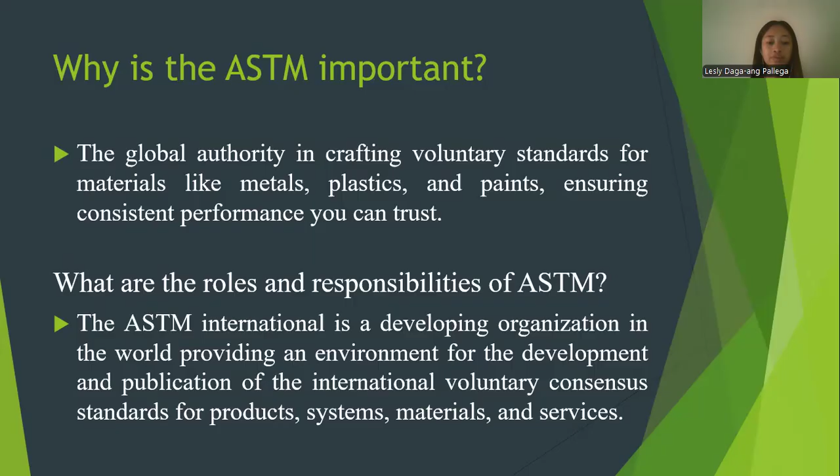What are the roles and responsibilities of ASTM? ASTM International is a developing organization in the world, providing an environment for the development and publication of international voluntary consensus standards for products, systems, materials, and services.

The history of ASTM. The American Society for Testing and Materials is an international standards organization focused on developing technical standards for a variety of industrial applications.

The ASTM organization was founded in 1898 by Charles Dudley. He was a chemist with the Pennsylvania Railroad while investigating rail breakage fractures. He noted there were different variations in steel quality and published his research on the subject. This subsequently led to the drafting of initial standards that have grown over the years.

ASTM was renamed ASTM International in 2001, and today has its headquarters located in West Conshohocken, Pennsylvania.

ASTM International does not formally enforce its standards, but these practices can be enforced by federal, state, and municipal regulations.

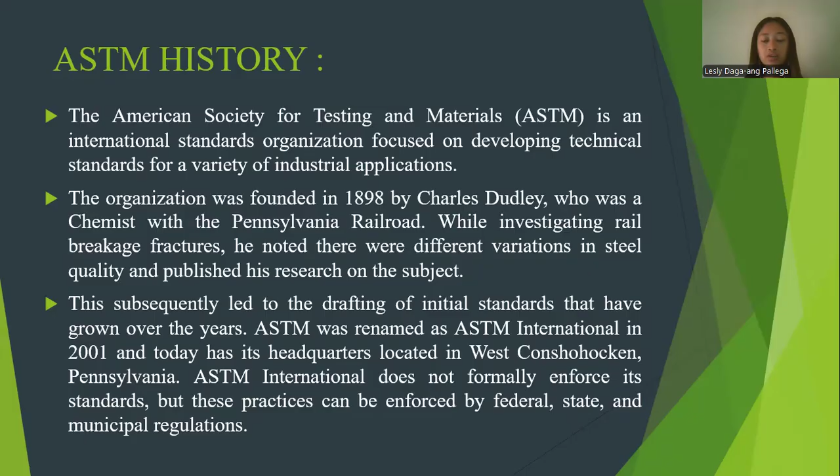What does ASTM stand for? Currently known as ASTM International, which is American Society for Testing and Materials, is a developer of international voluntary consensus standards. ASTM standards are developed by committees of relevant industry professionals who meet regularly in an open and transparent process to deliver standards, test methods, specifications, guides, and practices.

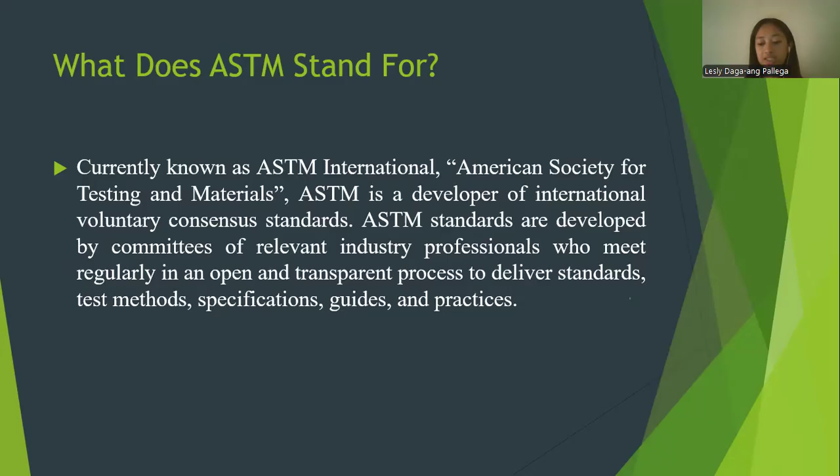The standards produced by ASTM International fall into 6 categories. First is the standard specification, which defines the requirements to be satisfied by the subject of the standard.

The second is the standard test method, which defines the way to test the performance and precision of the result. The result of the test will be used to assess compliance with the standard specification.

The third is the standard practice, which is defined as a sequence of operations that, unlike the standard test method, does not produce a result.

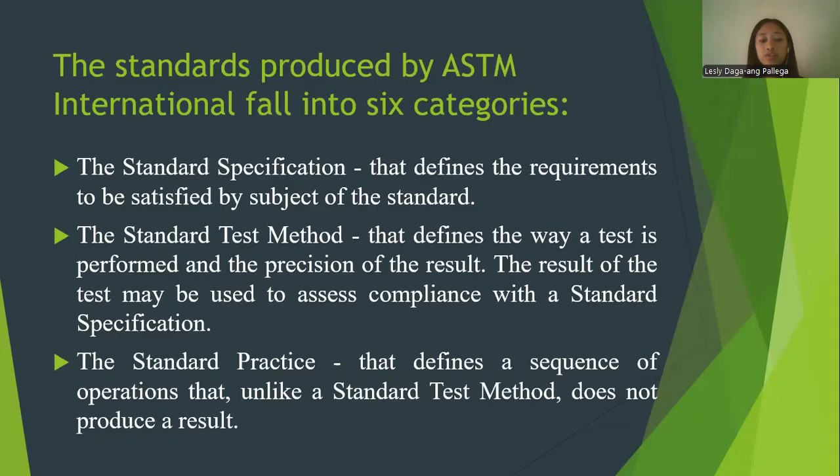The fourth is the standard guide, which provides an organized collection of information or series of options that does not recommend a specific course of action.

The fifth is the standard classification, which provides an arrangement or division of materials, products, systems, or services into groups based on similar characteristics such as origin, composition, and properties or uses.

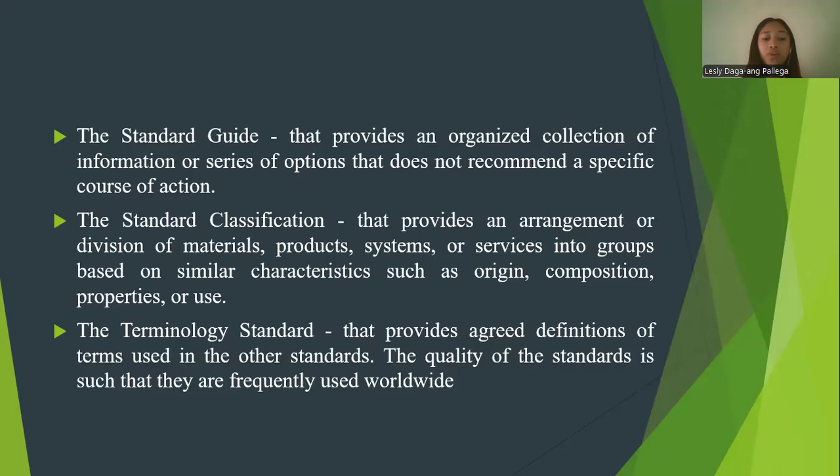And sixth is the terminology standard, which provides agreed definitions of terms used in the other standards. The quality of these standards is such that they are frequently used worldwide.

The different classes of ASTM: first is class A, for iron and steel materials. These class A standards cover iron and steel materials, including their structures, grades, castings, alloys, and mechanical testing. Steel is essential to the global economy, making ASTM standards widely applicable worldwide.

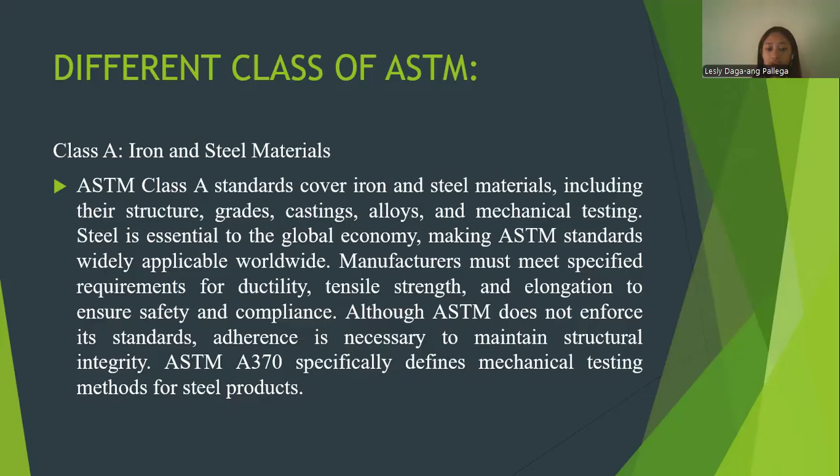Manufacturers must meet specified requirements and compliance, although ASTM does not enforce its standards. Adherence is necessary to maintain structural integrity. In ASTM, A370 specifically defines mechanical testing methods for steel products.

In Classification B, which is non-ferrous metal materials, it includes copper, aluminum, gold, and silver. Steel is classified separately under ASTM A because it is an iron-carbon alloy with widespread applications. Other metals and alloys such as brass fall under ASTM B classifications.

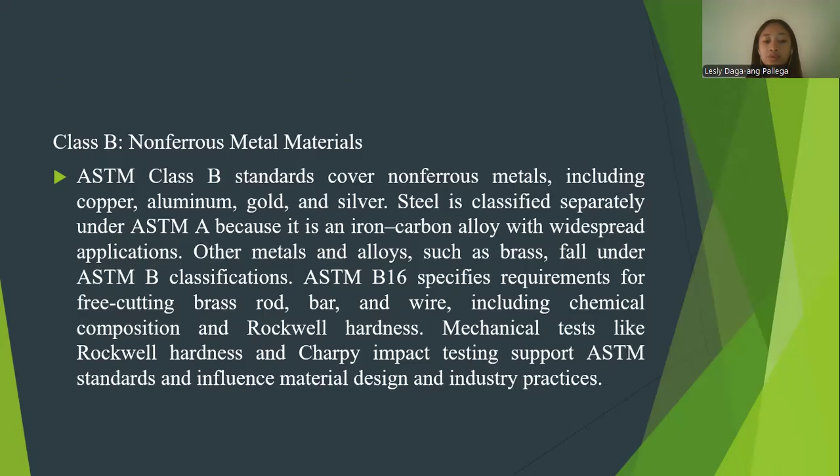ASTM B16 specifies requirements for free-cutting brass rod, bar, and wire, including chemical compositions and Rockwell hardness. Mechanical tests like Rockwell hardness and Charpy impact testing support ASTM standards influence material design and industrial practices.

In Class C, ceramic, concrete, and masonry materials. It is applied to ceramic, concrete, masonry, and glass materials.

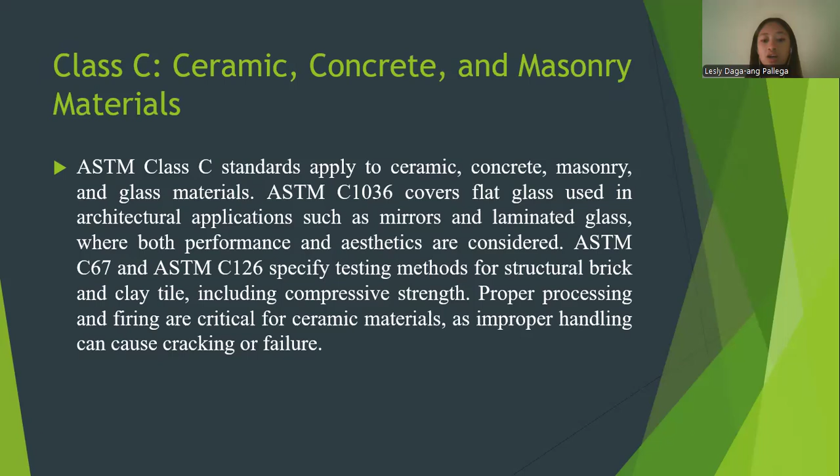C126 specify testing methods for structural brick and clay tile, including compressive strength, and proper processing and firing are critical for ceramic material, as improper handling can cause cracking or failures.

In Class D, miscellaneous materials, which includes plastic. Plastics are not given a standalone classification and are therefore included in this category.

ASTM D3350 defines standards for polyethylene plastics, specifying properties such as density, tensile strength, and slow crack growth resistance. For high-density polyethylene, materials must meet this testing requirement.

ASTM D3261 addresses plastic pipe and fitting connections using butt heat fusion. Class D also includes standards for water testing such as

D1293, and for elemental analysis, D1976, and electrical conductivity and resistivity, D1125.

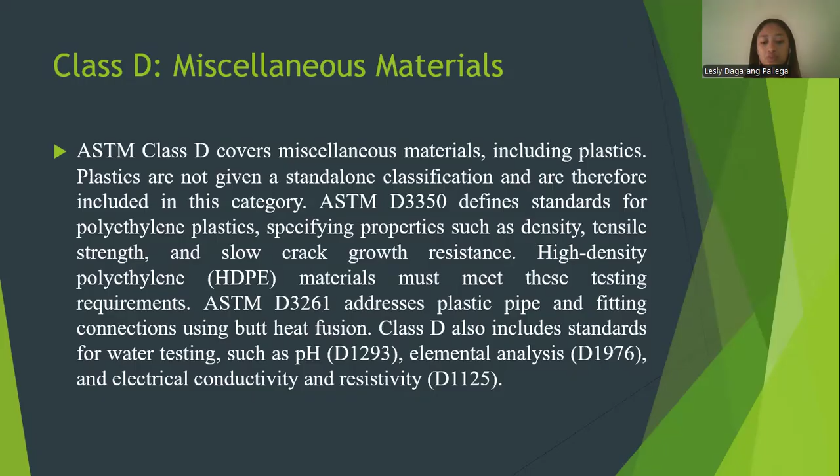In Class E, miscellaneous subjects, it includes fire, water, and materials performance testing.

Fire-related standards include ASTM E119 for fire resistance, ASTM E162 for surface flammability, E662 for smoke density, and E84 for surface burning characteristics.

ASTM E2178 addresses air permeance of building materials. Water-related standards include ASTM E96 for water vapor transmission and ASTM E1105 for water penetration of exterior windows and doors.

Class E also includes ASTM E23 for the Charpy impact test and ASTM E2149 for antimicrobial screening.

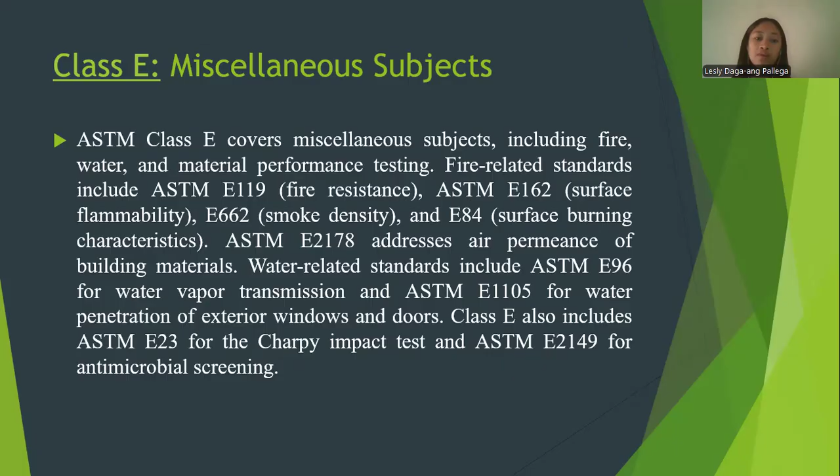In Class F, materials for specific applications, this is applied to material used in specific applications. This standard addresses specialized design and construction needs used where a universal standard is not sufficient.

Examples include ASTM F2787 for structural design of thermoplastic chambers, ASTM F2160 for solid wall HDPE conduit, and ASTM F2176 for joining HDPE conduit with mechanical couplings.

ASTM F1668 covers construction procedures for buried plastic pipe, while steel piping applications are more appropriately governed by ASTM Class A standards.

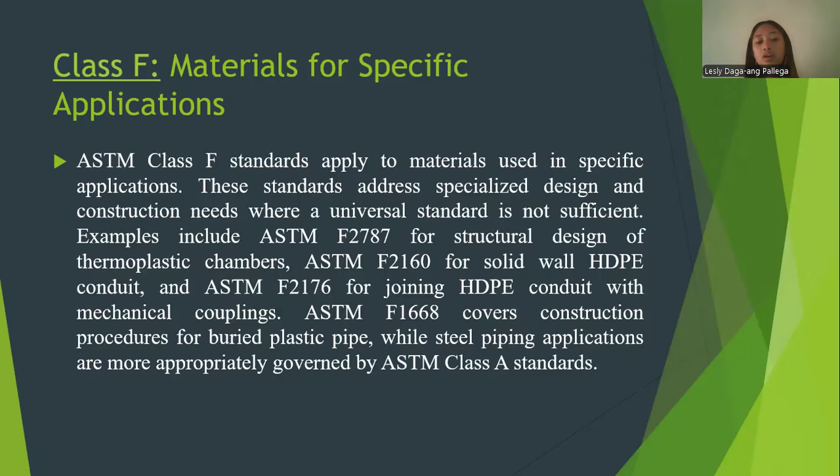In Class G, corrosion, deterioration, and degradation of materials. This standard focuses on the failure mechanisms and performance prediction under specific conditions.

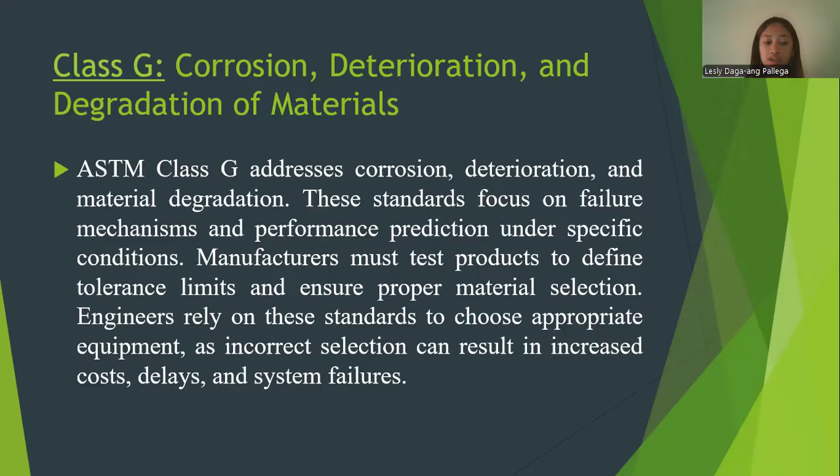Manufacturers must test products to define tolerance limits and ensure proper material selection. Engineers rely on this standard to choose appropriate equipment, as incorrect selections can result in increased costs, delays, and system failures.

The objective of ASTM is to provide an optimum environment and support for technical communities to develop needed standards and related information, ensuring ASTM International products and services are provided in a timely manner and meet current needs.

Third is to increase awareness of the ASTM International process, the benefits of broader participation, and the value of ASTM standards and services in the global market.

Fourth is to advance the international, regional, and national acceptance and use of ASTM products and services.

Fifth is to facilitate the use of ASTM International processes, resources, skills, and infrastructure for the marketplace to accommodate changing needs.

Sixth is to ensure fair representation and participation of key stakeholders in ASTM International activities, to help assure the development of technically sound, market-relevant standards. And the last is to maintain ASTM's fiscal stability in order to fulfill its societal mission.